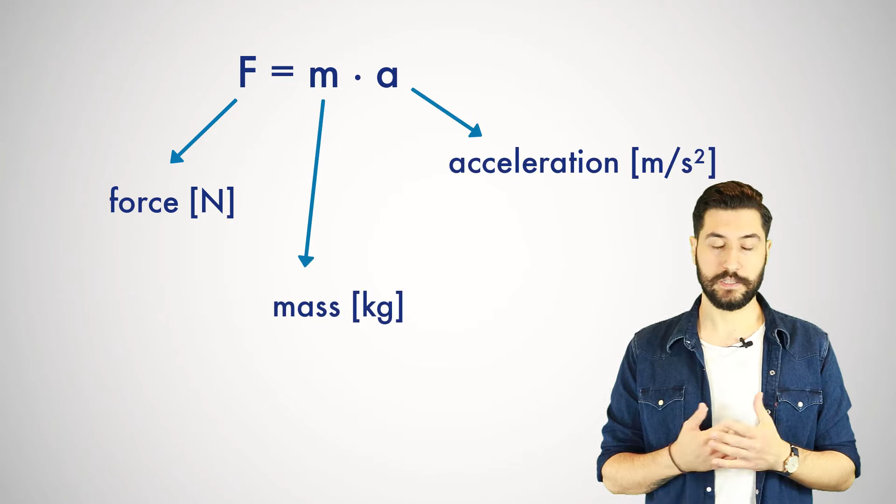A good guide value is, for example, a well-trained construction worker with a weight of 100 kilograms, who causes a force of 1 kilonewton due to the acceleration of gravity. We engineers consider forces to be somewhat simplified because our calculations are usually idealized.

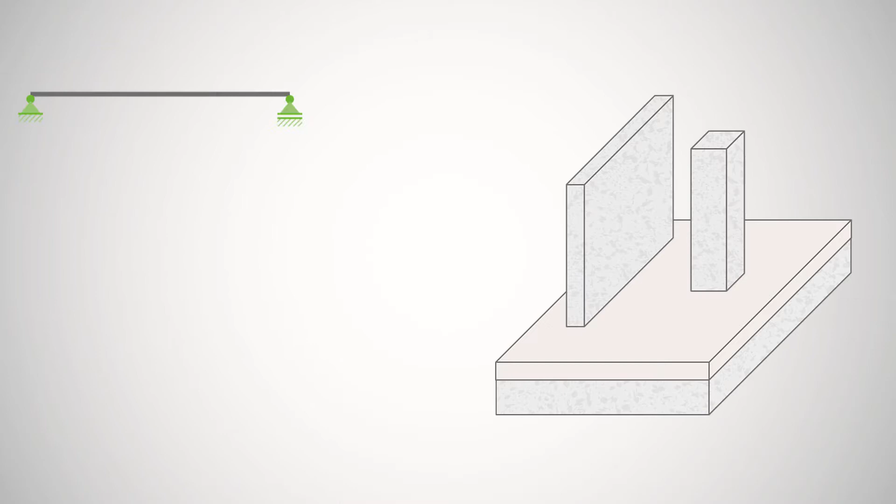Forces that act permanently or only sometimes on a structure, such as the self-weight of the structure, wind, snow, or even vehicles are called loads. We can divide these into the following types, depending on the target surface. Single loads. These are forces applied at specific points by an arrow indicating the direction and the point of application, such as the load transfer of a column to a foundation.

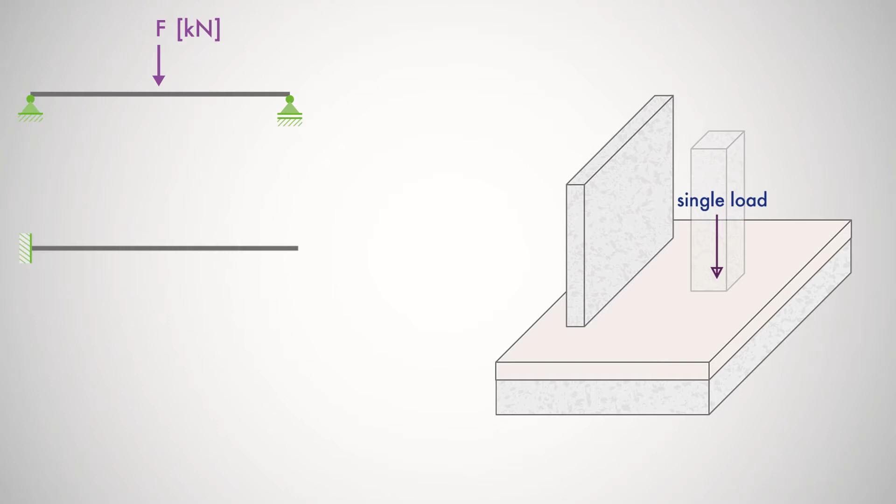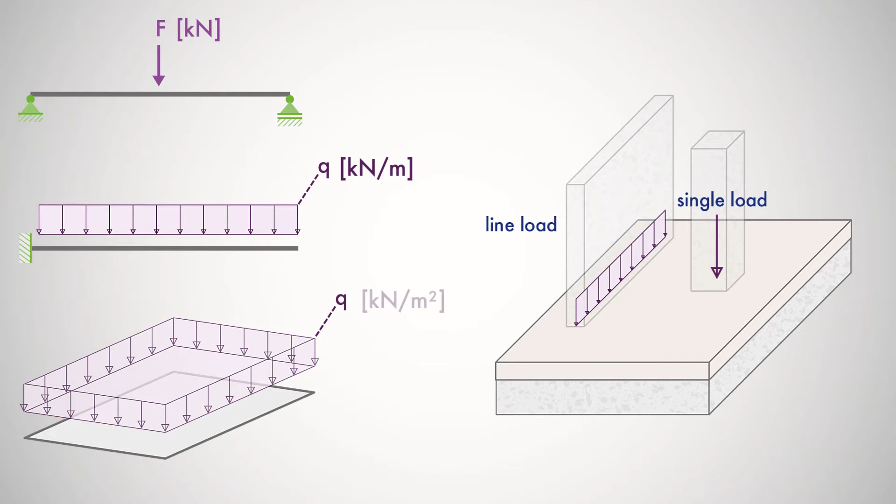Line loads. These are forces distributed over a certain length indicated by a series of arrows, such as non-load-bearing walls. And forces distributed over a certain surface are symbolized by a surface of arrows, such as the floor structure of a floor slab. These are called surface loads.

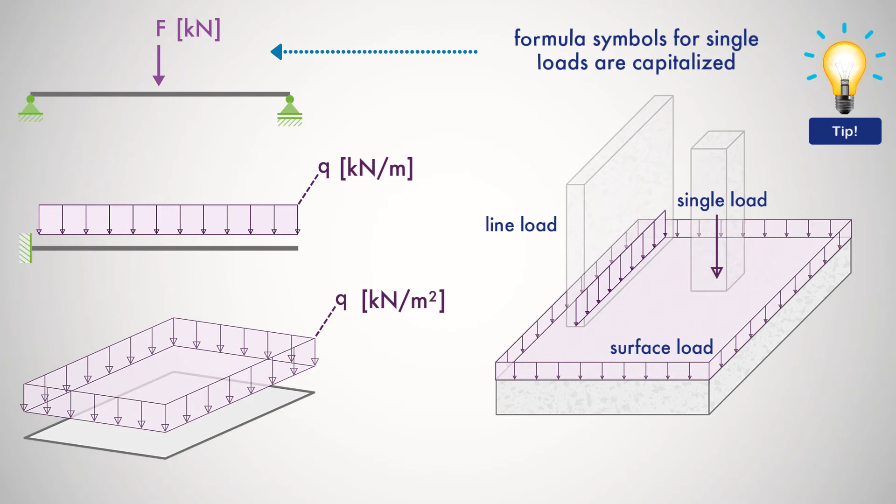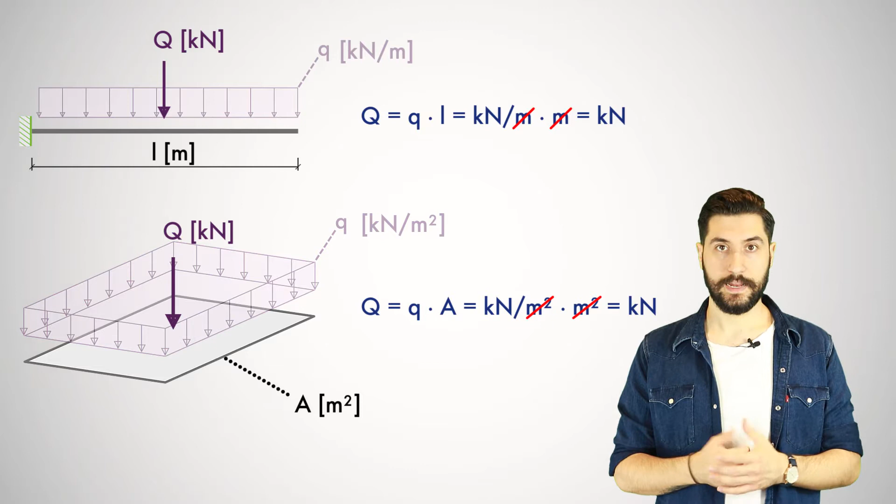You can find the resulting concentrated load from line loads and surface loads by multiplying it by the respective length or area. However, there are not only constant line or surface loads. Trapezoidal or triangular loads are also very common in structural design, for example, by the load distribution of a floor.

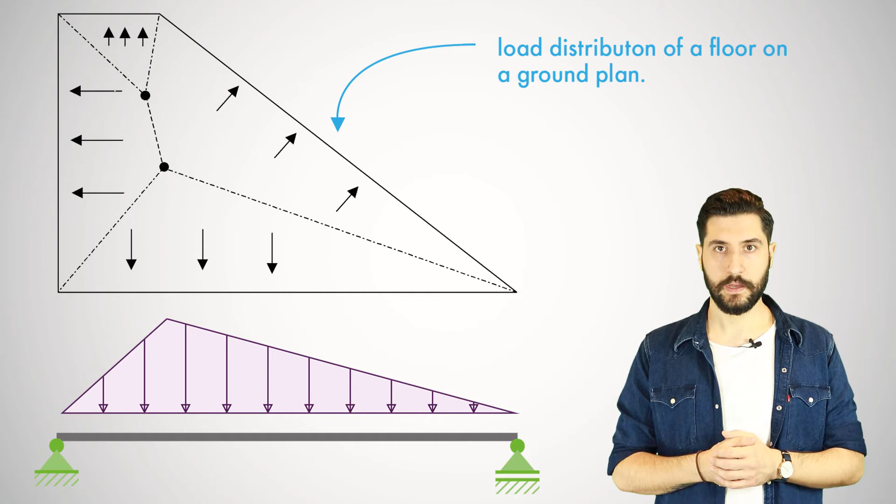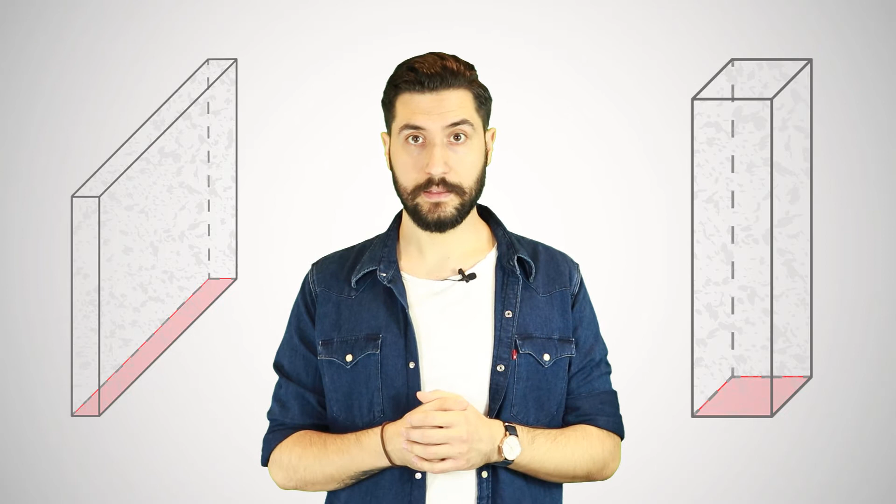Point loads and line loads do not really exist, because all structural components or bodies have an action surface, albeit a very small one. Simplifying and on the safe side, we do not consider them as surface loads, but idealize them. In the practical implementation in the structural analysis software RFEM, it looks something like this.

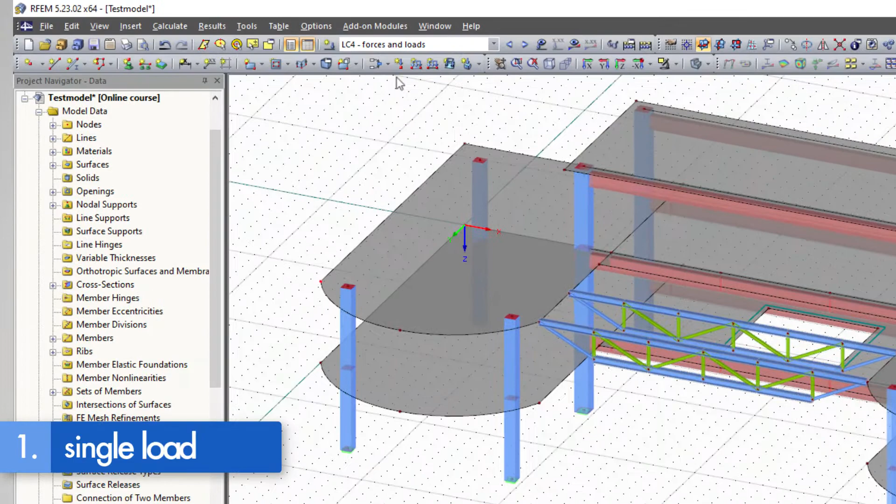First, we select the desired load case in which we want to enter our loads. A single load corresponds to a nodal load in RFEM, so we simply click the node where we want to apply the load. Then we select New Nodal Load and enter our load parameters.

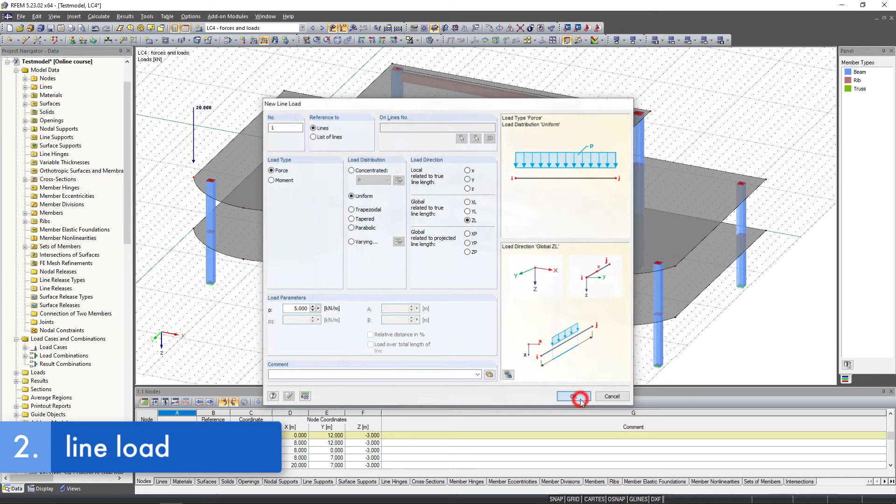To enter a line load, we have to differentiate between line loads and member loads in RFEM. If we want to apply the load to a surface that is surrounded by lines or on which lines are located, we use line loads. For beam structures, we use member loads instead of line loads.

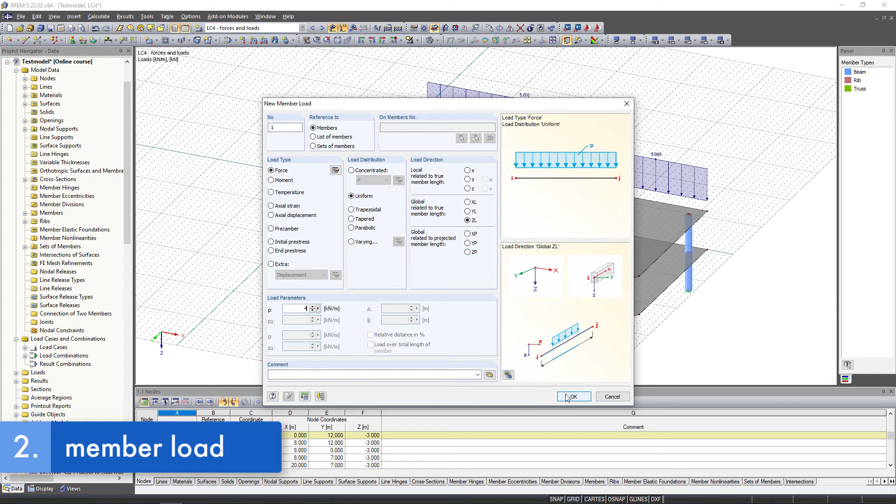Finally, we enter a surface load. To do this, we click New Surface Load, enter our load size, and select our desired surface.